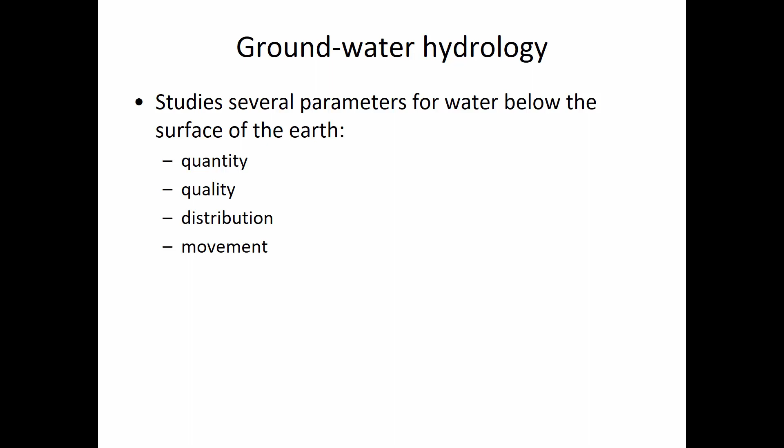It's great to become familiar with those, because although at the FE level those questions don't take into account variations of soil underground—it's just assuming a homogeneous dispersion of the soil—it's still kind of interesting.

It's just easy to measure resistivity, so that's why it would be measured as a proxy for pollutants. This is a key nexus area for environmental engineering and hydrology.

A lot of the reasons why we're interested in the movement of water underground may be related to water production, but sometimes it's also related to contaminated soil. In the past, up through the 60s and in some cases as late as the 70s, it was pretty common for businesses to land-apply leftover chemicals like PCBs, used in transformers as an insulating fluid, which are really harmful to human health. Another common underground pollutant is trichloroethylene, used as a dry cleaning fluid.

When I was a grad student, we went and looked at a location contaminated with explosives in the soil, from explosives made during World War II, that are still being filtered out of the drinking water in a little town called Mapleton, Utah. It's interesting how long these problems can last, because once the contaminant gets down into the soil, it disperses like crazy.

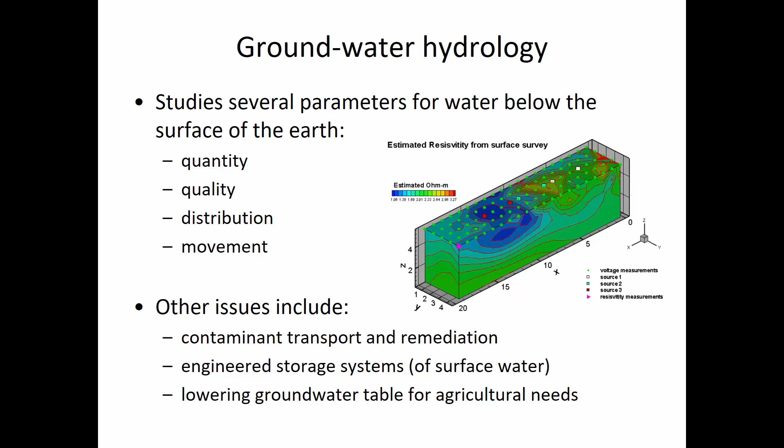And there's been some environmental remediation truck constantly parked over there, and it kind of looks like they might be doing some soil vapor extraction or venting or something. So there's probably a lot more plumes than we recognize. There's some of the big ones, like at a big chemical plant, but then I think even on the smaller scale, it can be something as seemingly innocuous as a gasoline station that is going to be really expensive to mitigate.

Another reason why subsurface hydrology is so important is because it's a huge fraction of the fresh water that exists on our planet. Now, most of the H2O on planet Earth is in the oceans, and it's challenging to use that water. It can be done through thermal distillation, through desalination, by membrane technologies, but the cost of producing a cubic meter of water from the ocean, I think at best is in the range of maybe about 50 cents per cubic meter. They're always working to get that a little bit lower, but anyways, it gives you a scale, at least, like a ballpark order of magnitude estimate of the cost of generating water from the sea.

In contrast to that, it's exponentially less expensive to just pump water from the subsurface environment. The advantages of doing that is, number one, most of the groundwater, unless it's under the influence of the ocean or another saline sea, the water in a lot of cases is fresh and can be used directly, especially if it's for irrigation, and there's no need to disinfect and coagulate and all that. You can just pump it out and irrigate with it.

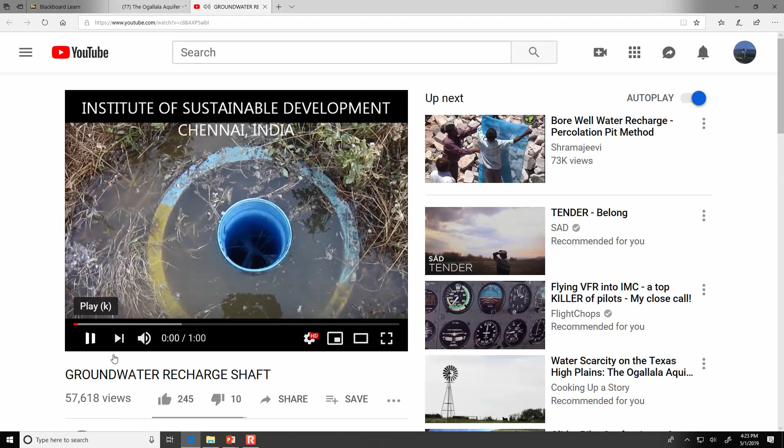If we think about what's happening there, it's increasing recharge compared to what would normally occur, for a couple of different reasons. It's as simple as digging a hole, but the reason we have enhanced recharge there involves a couple of things we've talked about regarding infiltration before.

When we discussed infiltration in the general principles of hydrology, one principle we learned is that the depth of water at the surface is one of the driving factors that pushes water through the soil. When we did the Green-Ampt model, we assumed continuous ponding at the surface, and how deep the water is becomes the driving force that pushes water into the pores.

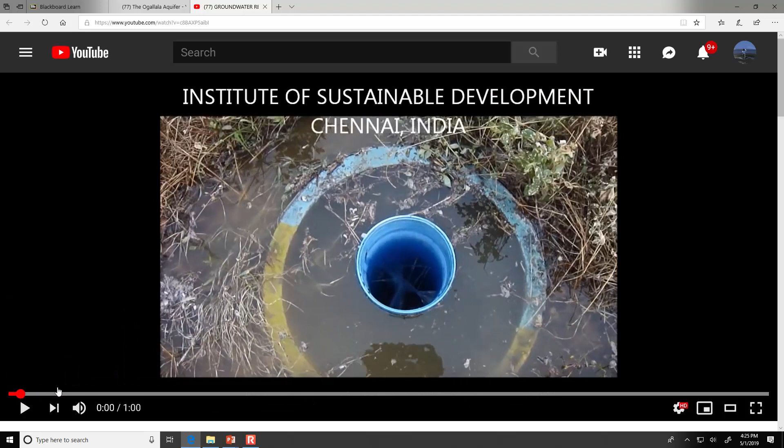At the surface, there are a couple of things that interfere with that. Number one, if the water is spread out over a field, like we saw at the beginning, this field and surrounding area is very shallow. If there's silt or clay, fine suspended particles, those clays settle down and clog the pores. So you've got really small pores for the water to get into, and number two, it's relatively shallow, so there's a small driving force.

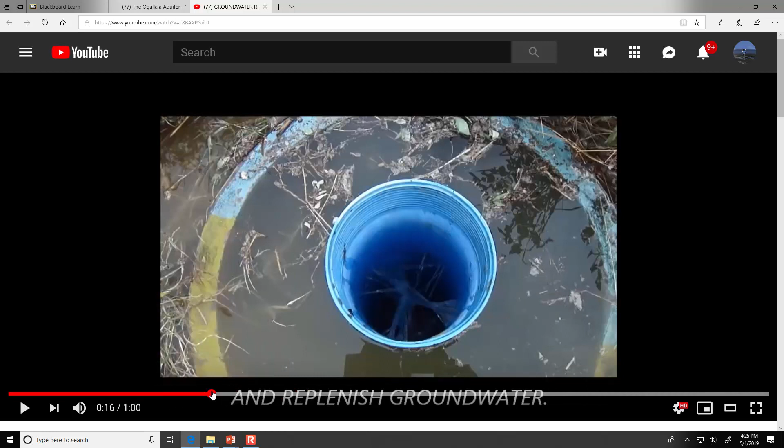In contrast, when they use something like this, let's say the water table is here, but they've got water all the way up here—now there's a greater delta H, the driving force pushing water into the soil is relatively larger than if it was just ponding at the surface.

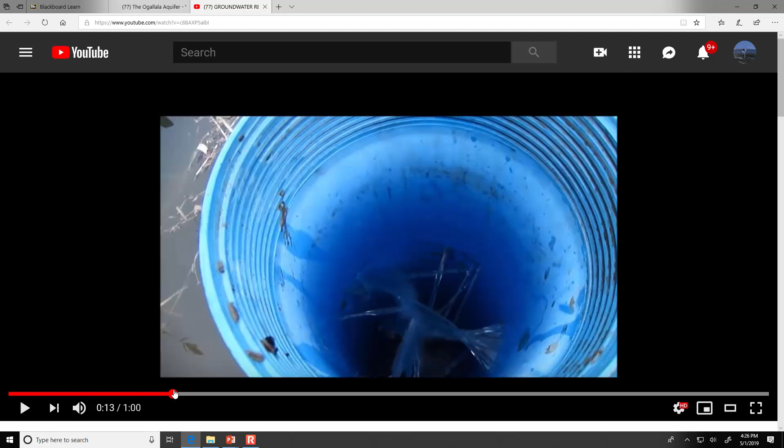The other opportunity, although I'm not sure if they're taking it here, is that this ring around the edge could feasibly be used to skim pollutants so you have cleaner water going into the recharge well. Best case, they'd be filtering the sediment out so the screen inside the well casing doesn't become clogged with turbidity, clays, and silt in the water. So it overcomes a couple of the barriers to increased recharge.

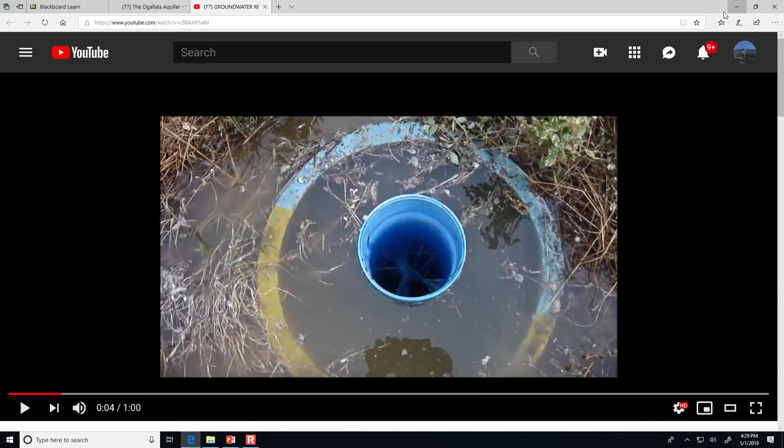Oops. It's like I've never used Windows before. There we go.

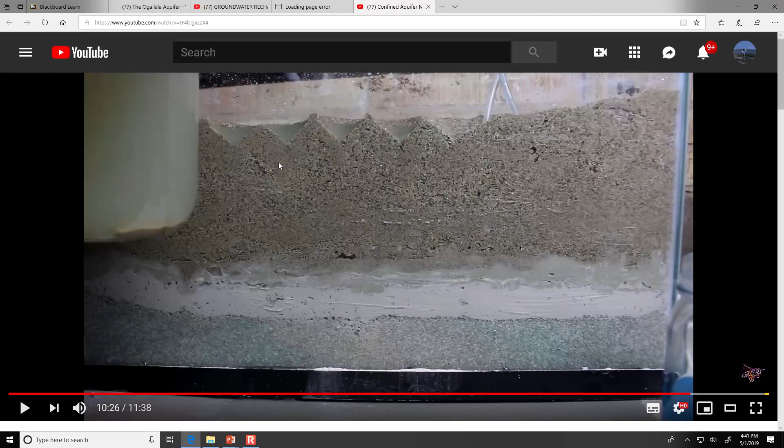All right, so it was actually this section that I thought was kind of the most applicable visualization of what we're going to be calculating today. I've got a couple of diagrams, and we're going to be using a formula that calculates the flow rate coming out as a function of what the cone of depression is doing.

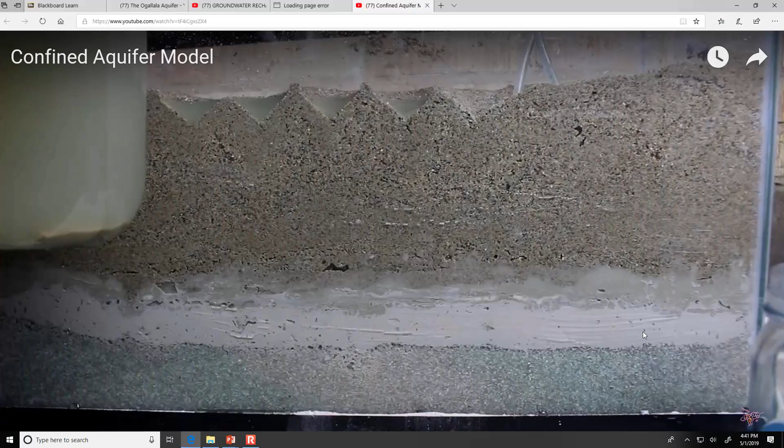That cone of depression in an unconfined aquifer is what we could measure with a monitoring well to know what the pressure is inside the aquifer, and it's that pressure that's the driving force of the water towards the well casing. He also talked about how in the confined section it's similar, although it's not a physical water surface but rather the pressure surface, the piezometric surface, and we'll go over the equations for that.

So artesian is when water flows freely at the surface because the ground level is lower than the piezometric elevation. An aquitard, a phrase used in that video, is any layer that's slowing down the water's movement. A leaky aquifer is when there's a semi-pervious layer, meaning the hydraulic conductivity is relatively low, but not as low as rock or clay.

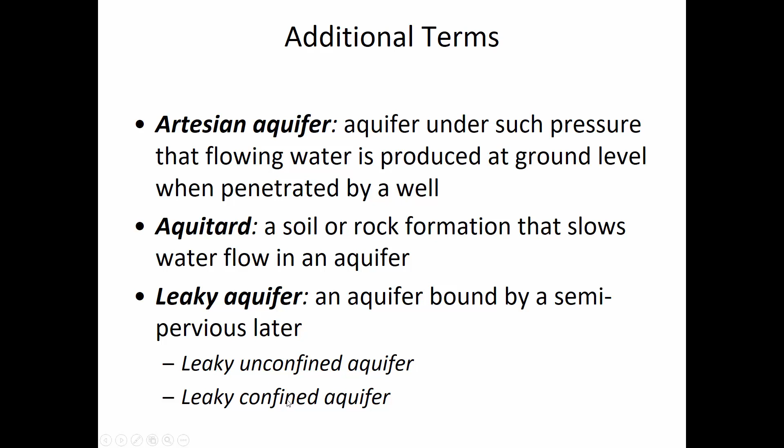Sometimes an aquifer can leak too, if it has a rock layer that's fractured. So there can be both an unconfined leaky aquifer and a confined leaky aquifer, and in fact the leakage can happen upwards. If it's a confined aquifer with fractures in this layer, it's possible that the water is leaking upward.

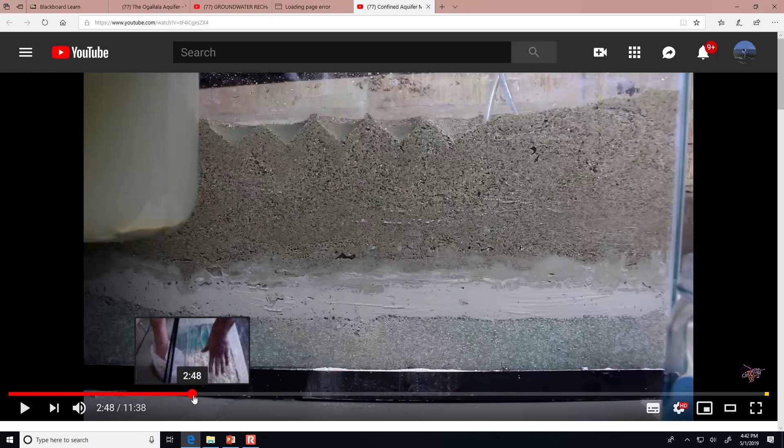We saw that same thing in the video, where he was complaining about the water bubbling to the surface, and he just jammed it back down with his finger again. But the water was leaking upwards, so that was a good illustration of that as well.

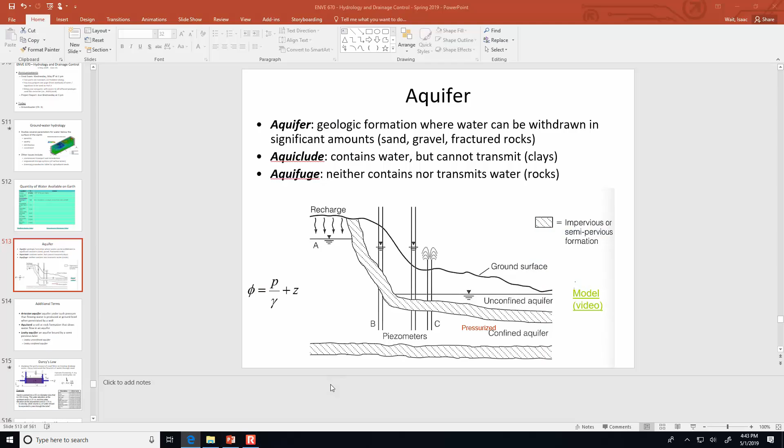And we can get the flow rate of water through a packed column by knowing what's in there. These hydraulic conductivity properties have been accurately described for a whole range of soils. Just as another refresher on how to use Darcy's law, let's take a look at this example.

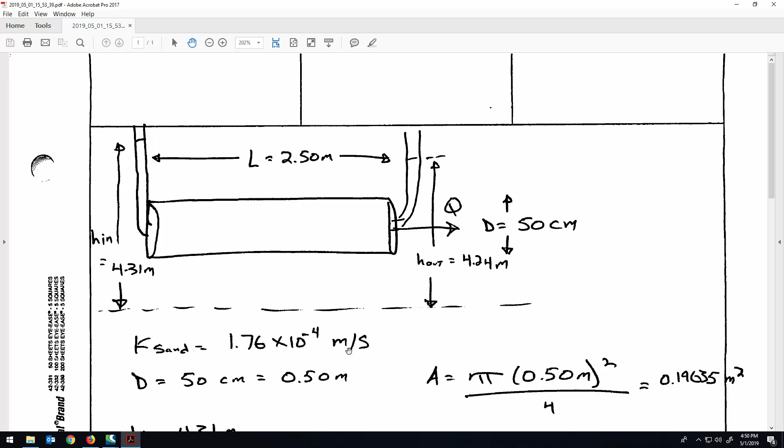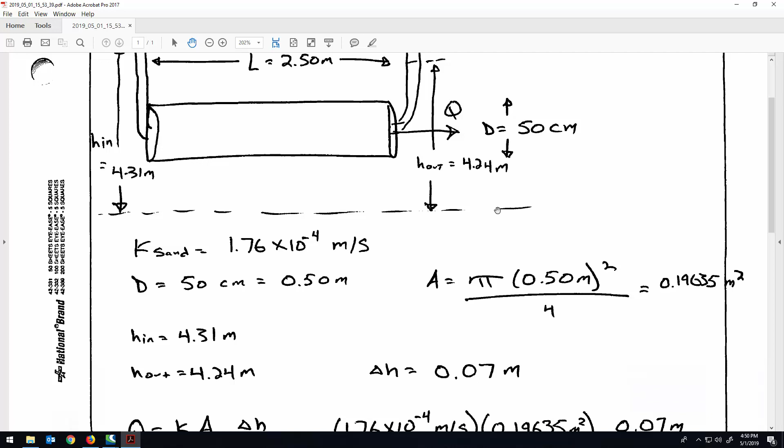We've got a column that's 2.5 meters long. We're given the diameter, and from that we can calculate the cross-sectional area. We get the K value for the sand from the table, being sure to use the SI version rather than traditional units. The delta H is defined by the difference in elevations for the upstream and downstream components. The units we get when we put it into Darcy's equation are cubic meters per second. If we want to convert that into liters per day, we have to multiply by 86,400 seconds per day and 1,000 liters per cubic meter.

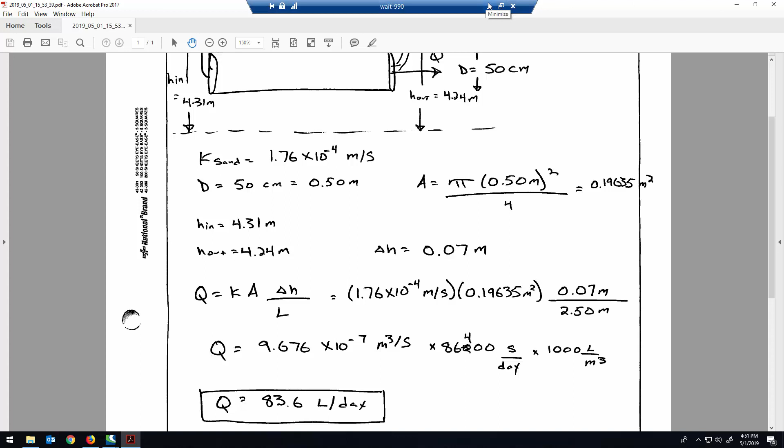Good, good. Yeah, that's one of my favorite ways to catch students, with the little units conversion at the end. It seems like sometimes, especially on the licensing exams, they're emphasizing unit conversions quite a lot. Have you already taken the PE test? I'm going to in October. Oh, I think ENVE passed it, so. Good.

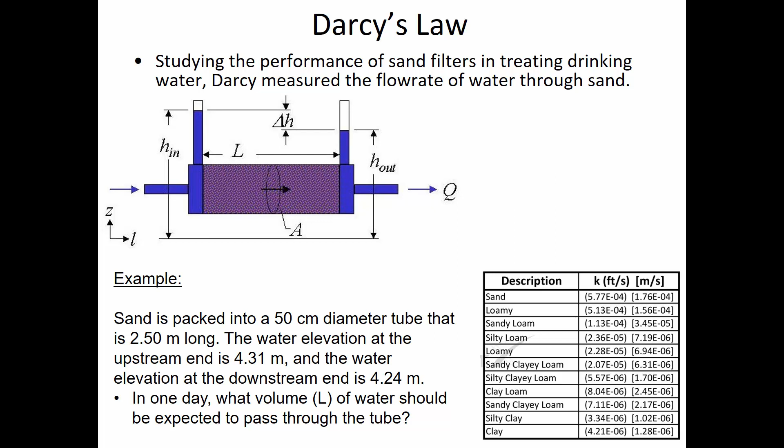It's a simultaneous process where you take a liter of water out of the underground environment and there's a temporary depression. Because you've removed some water, water from surrounding areas sees a low spot in the energy. Water flows downhill, whether above ground or below ground, and that downhill area is inside the well casing.

When you take a liter of water out, the water level inside the well casing becomes lower than the water in the surrounding soil. It reacts more slowly in the underground environment than it would in something like a lake being extracted. So the water gradually moves in the direction of the lowest energy level.

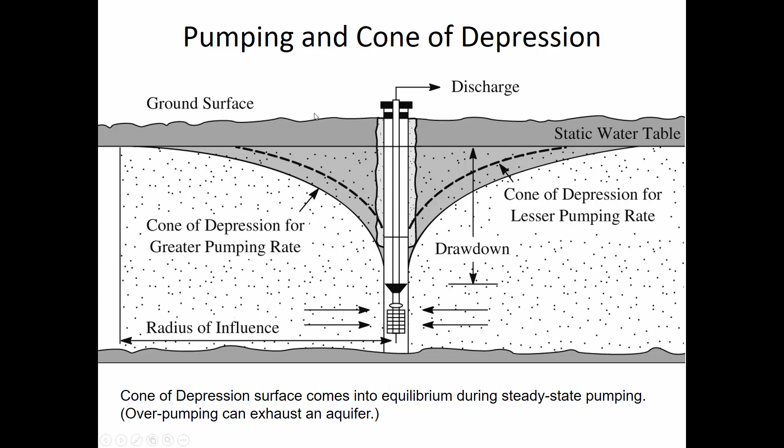One of the measurements can be at the well casing itself, so we really only need one monitoring well besides the production well to use the equations we're going to cover.

There are a couple of effects illustrated here, one being the hydraulic conductivity of the soil. In the case of coarse gravel, water can flow more easily towards the well, so there doesn't have to be as much drawdown for the same flow rate. In both diagrams, let's assume a constant flow rate for the one on the left and the one on the right.

For purposes of illustration, say we're extracting 1 liter per second from both. For that liter per second to move through the coarse gravel, you don't need as much drawdown because the hydraulic conductivity is higher. Whereas with sand, there has to be more drawdown to provide enough of an energy drop to cause the water to flow through those smaller pores.

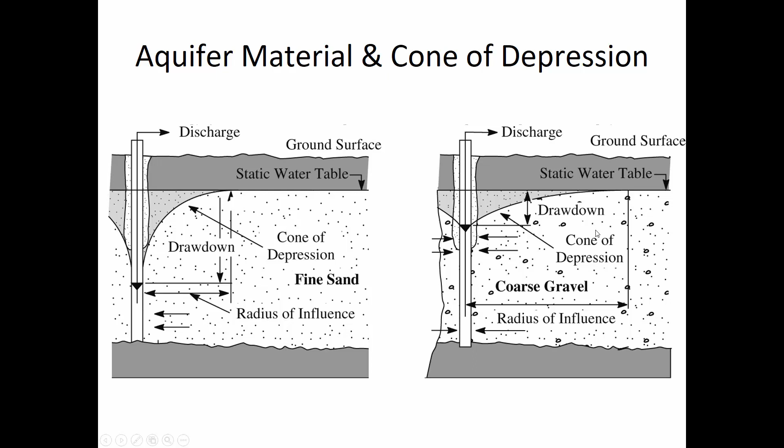Remember, the continually connected system of pores in the underground environment is a bit like a pipe, and a small diameter pipe has larger head loss. So there's more head loss as water flows through the sand to reach the well than in the relatively larger voids of the coarse gravel.

So if we have overlapping cones of depression, meaning both of these are discharge wells, what we would have seen from any one of them individually is magnified, bringing the overall cone of depression lower. This shows what the cone of depression would look like just for well A, but if there's an adjacent well causing influence with well A, it has kind of an additive effect on the cone of depression.

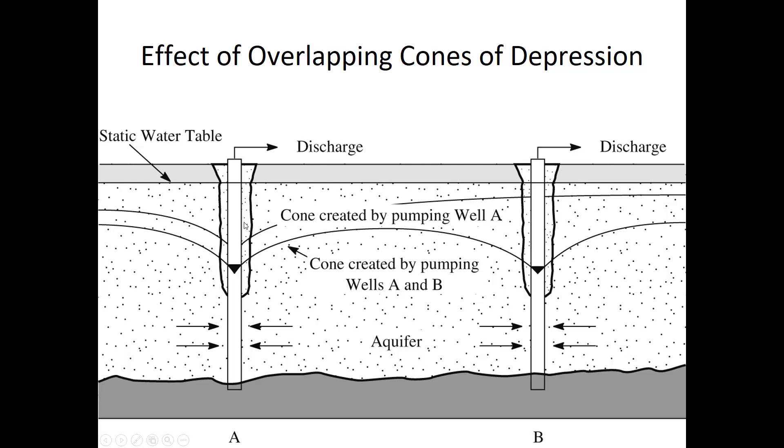Some terms you'll see in problems of this type: fully penetrating means the well casing goes all the way down to the bottom of the aquifer. The screen is usually a slotted pipe, maybe plastic, with very small diameter cuts to allow water to seep in. The well radius is sometimes used as one of the distance terms in the well equations we're going to look at, so it's important to distinguish between the diameter of the pipe the well is made out of and the well radius, which is what we'll use as a distance measurement in the production equations.

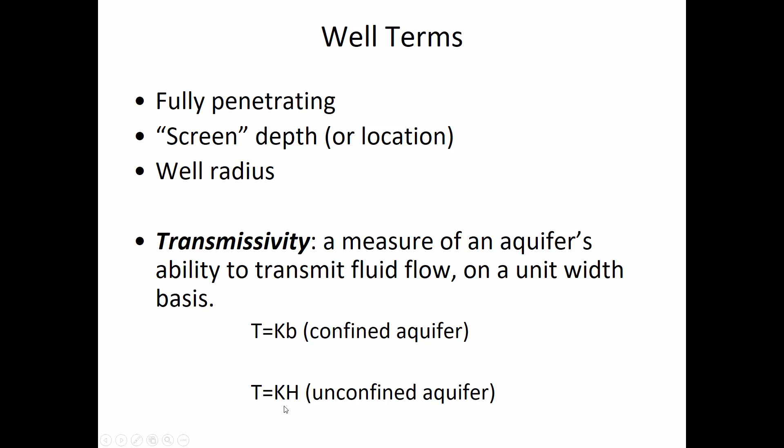Transmissivity is the hydraulic conductivity K multiplied by the thickness of the aquifer. In a confined aquifer, we usually measure that height with the variable B, whereas in an unconfined aquifer, the depth of water from the bottom confining layer up to the vadose zone is H. Hydraulic conductivity has units of length per time, and aquifer thickness B has units of length. Transmissivity is the product of the conductivity and the aquifer thickness.

Piezometric head is used for confined aquifers because we aren't measuring a physical water surface, but rather the surface described by the hydraulic grade line and the measurement of pressure. Remember that when water flows through a porous medium, some of the soil porosity may not be connected. An example is lava rock—it has a lot of pores, but not all are connected, so only the pores that can transmit water are included in calculations of porosity.

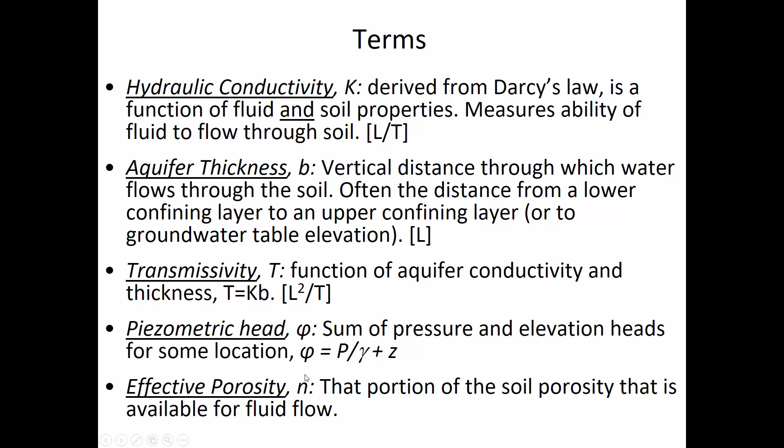The confined case is the easiest of the two when comparing an unconfined aquifer and a confined aquifer. They're closely related, but strictly speaking, confined aquifer calculations are a little easier, because we don't have to calculate a corrected height—it's just an actual measured height.

The production of water flowing through the well is related to 2 pi. Remember we're looking at a cross-sectional view, but it's actually a circular cone of depression. If we assume a homogeneous soil—the same type all the way through with the same hydraulic conductivity—it will look like a funnel, that cone of depression. But in this case it's not a physical cone of depression, it's a piezometric surface. The transmissivity is the depth of the aquifer, B, multiplied by the hydraulic conductivity.

What's really important is the convention in assigning 1 versus 2. It's easy to assume those two things are interchangeable, but the way the equation is set up, location 1 is the location closer to the center line of the pumping well, and 2 is the one further away—just as it's pictured.

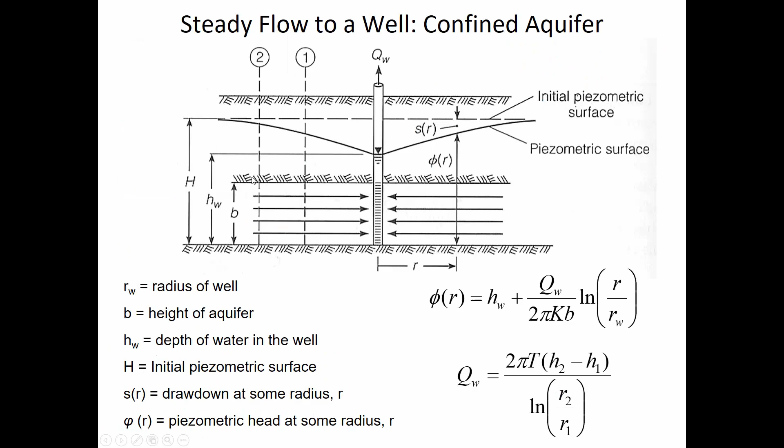So this is the equation for a confined aquifer, and this is what it looks like in the FE reference manual.

Since you've already taken and passed the FE, by the way, they're coming up with a standardized reference manual for the PE exam too. I don't know if it'll be in place by the time you take the PE exam, maybe a year after. I don't think it'll be ready by November, but they are working on it, which will be nice because then you won't have to wheel in a wheelbarrow full of books.

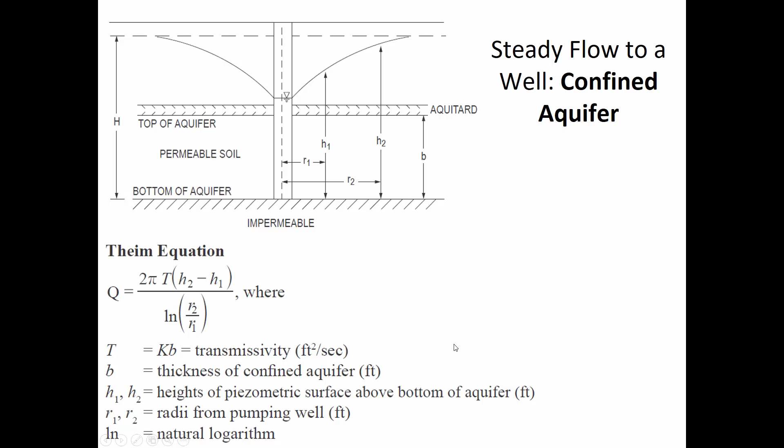So the equation looks the same in the FE manual as the textbook version presented. Let's practice using the confined aquifer equation here.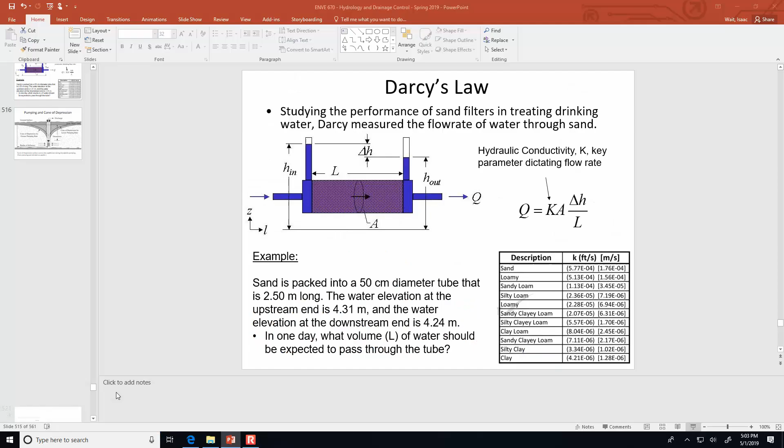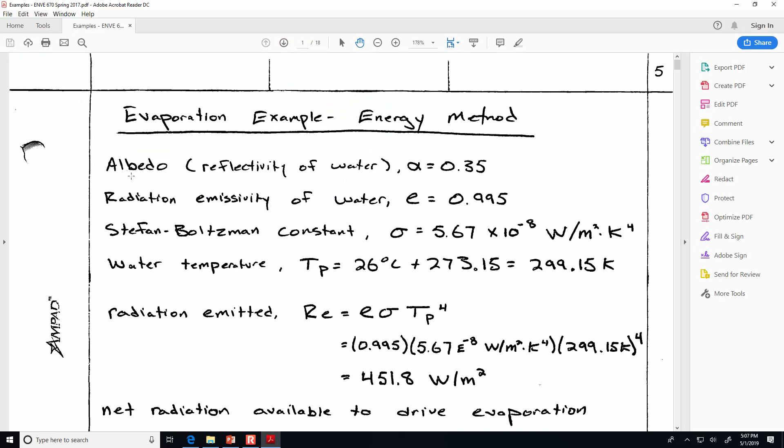What's sometimes tricky about writing problems of this sort is that it's easy to write a problem that's not possible, like where the flow rate and the radius don't match up. So let's take a look at this one.

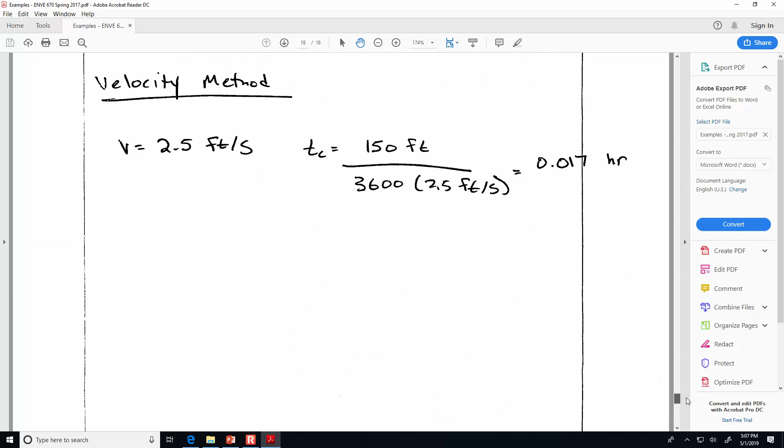So we've got a K of 20. The depth of the aquifer is 6.6 meters, and this H of 14.53 — if we go to the sketch, that's just the initial height from the bottom to the top. So 14.53 is that, and we want to find out the flow rate.

H1 is 13.85, so location 1 is the closer one, and the closer location is going to have more drawdown, so it's going to be the lower of the two numbers. R1 is 40 meters, R2 is 85. So flow rate is 506 cubic meters per day.

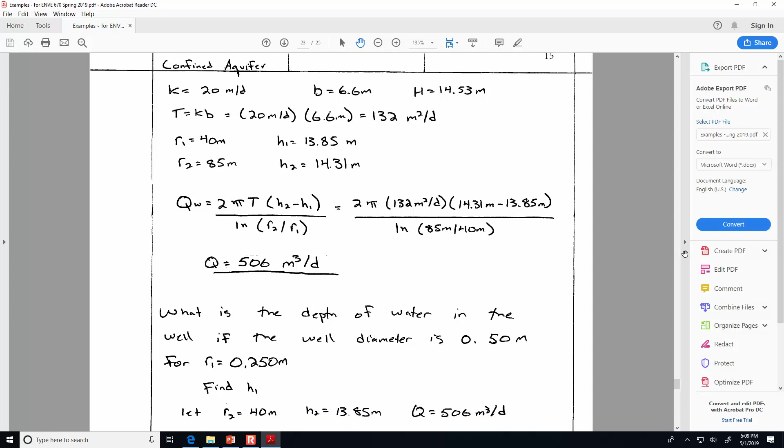That's pretty huge — I guess this hydraulic conductivity is a little on the high side of anything that would be observed in reality. But then if we have that same flow rate, the question is what would be the depth of the water at the well?

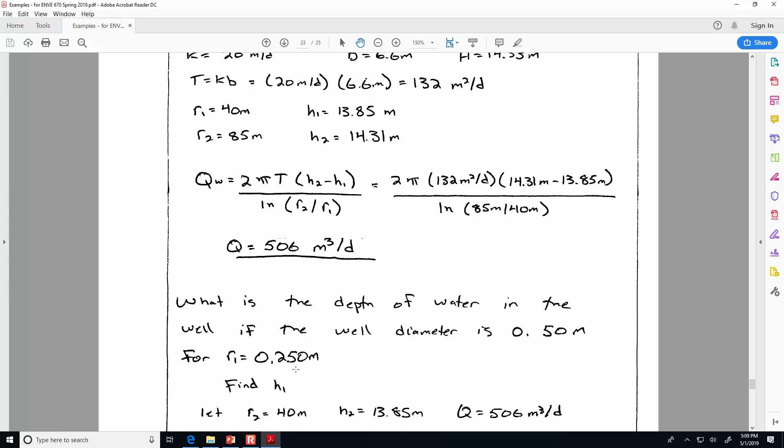So what we're doing is starting with this: Q is given, and we can use either of these locations to be our location 2. We're going to say location 1 is at the well itself, so that means R1 is going to be half the diameter of the well, and we're solving for H1 — just rearranging the equation to solve for H1 in terms of H2 and everything else.

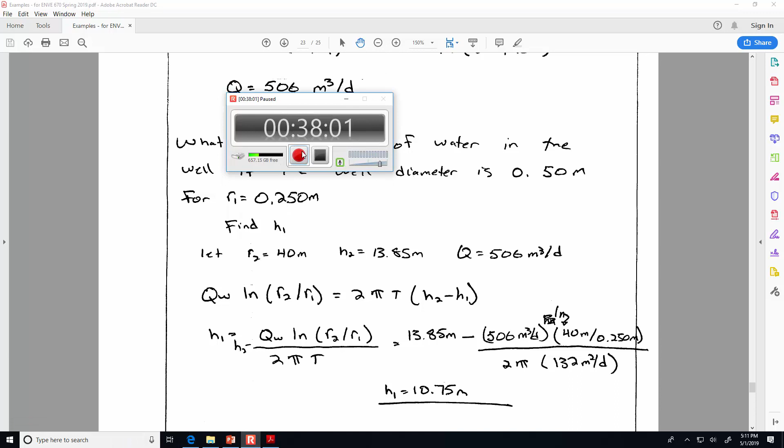Now there is going to be a well problem on the final exam — I won't tell you if it's confined or unconfined — but even though we haven't had a chance to do a homework assignment on it, there will be a well-related problem, so I'm glad you're taking good notes.

On the second part, we did half the radius — half the diameter. Yeah, because what we're saying is that the location where we're measuring the water depth is inside the well itself, so the radius, the distance from the center line of the well, will just be the outside of the pipe.

Ooh, I just realized this microphone was in my pocket. This has been really interesting to listen to.

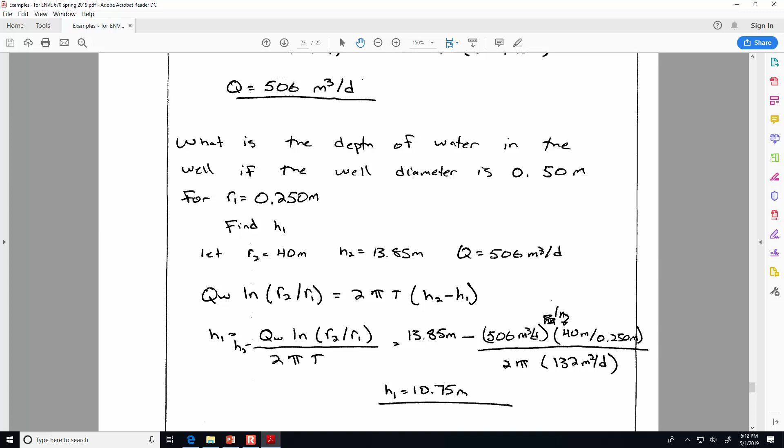But the other one, where it's outside, we just take the full radius — we don't have to limit it. And so we could have used either of these other locations. In this problem, we used the place where we've got 40 meters, but you could have put in the place where it is 85 meters, and you would have gotten the same answer as long as you used this as the H2.

All right, so that is confined.

Unconfined is a little bit different, because what you're doing is squaring the term where we're measuring the elevation. If you look at the path line the water follows, in a confined aquifer the water just flows horizontally towards the well. But in an unconfined aquifer, it's not just the piezometric surface experiencing drawdown, but the water itself. The flow lines are shaped such that it has an effect on the energy loss. The path is longer than it otherwise would have been if it were a horizontal distance. So the way this equation corrects for that, in a simplistic way, is by squaring the difference of each term and taking the difference as the driving force.

Yeah, that's almost it. Okay, so here is the version of Dupuit's formula in the FE reference manual.

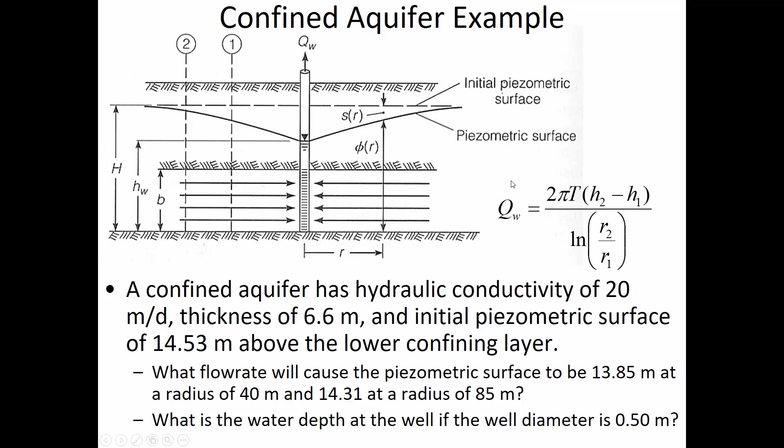Same as what we had before, but notice that when working with the confined aquifer, we were using the transmissivity. Now, the transmissivity isn't in there—it's just the hydraulic conductivity.

There isn't a well thickness going in, but that's another reason we're squaring these terms: the units wouldn't quite work out to get length cubed per time unless we were squaring this, because the units of K are length per time. So if we want length cubed per time, we have to have another length term in there. That's where we get it.

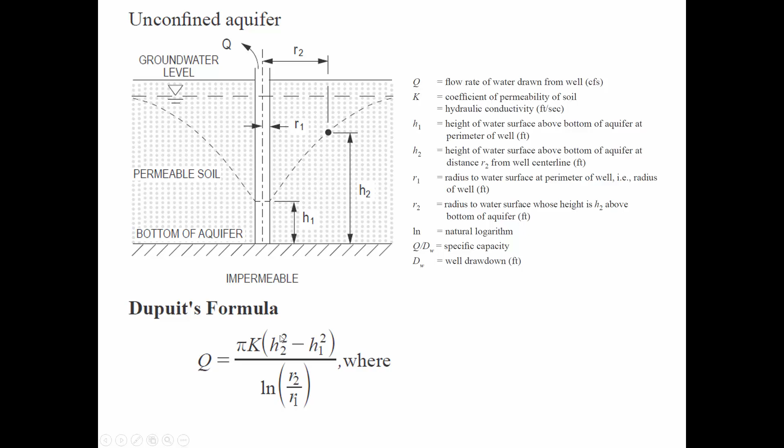Let's try that out in the unconfined aquifer. The flow rate is known, 0.4 cubic meters per second. The way they're describing the shape of the drawdown: 50 meters from the well, the drawdown is 1 meter. They're measuring from the initial phreatic surface down to where the water surface actually is. Then 100 meters from the well it's 0.5 meters.

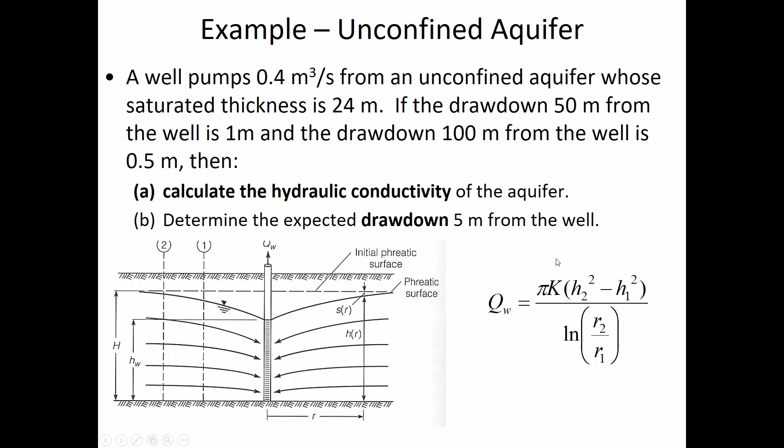Remember, that's not H. What we have to do is find H1 and H2 from the initial saturated thickness. So H2 is going to be 24 meters minus 0.5, and H1 is going to be 24 meters minus 1 meter. Then R1 will be 50 meters, R2 will be 100. So what we're trying to do in this case is calculate K, the unknown hydraulic conductivity.

The two things we want to know are the hydraulic conductivity, and then, if we get closer to the well, what the drawdown looks like just 5 meters away from the center. We both got the same hydraulic conductivity. Remember what we were given was the drawdowns, so we have to convert from drawdown to water height. If the initial water height was 24, we just do the algebra to rearrange in terms of the unknown K and make the substitution. We both got the hydraulic conductivity was 3.8 times 10 to the minus third.

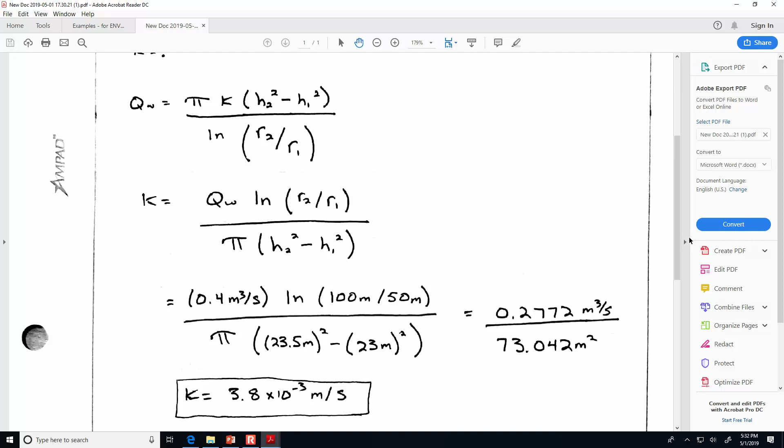And then for the drawdown—sorry, that's a little sloppy—2.74 meters should be the drawdown. The way we do that: I'm calling location 2, in this case, the place where the height was 23.5 meters, at a radius of 100. You could have also made location 2 at a radius of 50, and then H1 would be 23.

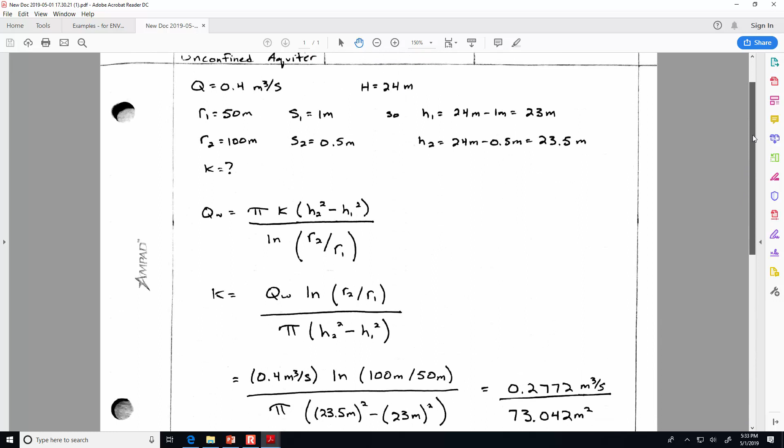So you'll see the ratio of distances is 100 meters versus 5 meters, and we're solving for the unknown height—it should be 21.26. That matches up with what we know to be reasonable: the drawdown is going to be a lot more dramatic the closer you get. We're seeing a lot more drawdown where it was only half a meter at 100 meters out, and at 50 meters the drawdown was down to 1 meter, so it's going to be quite a lot further down as you approach the well. That cone is getting more dramatically deeper.